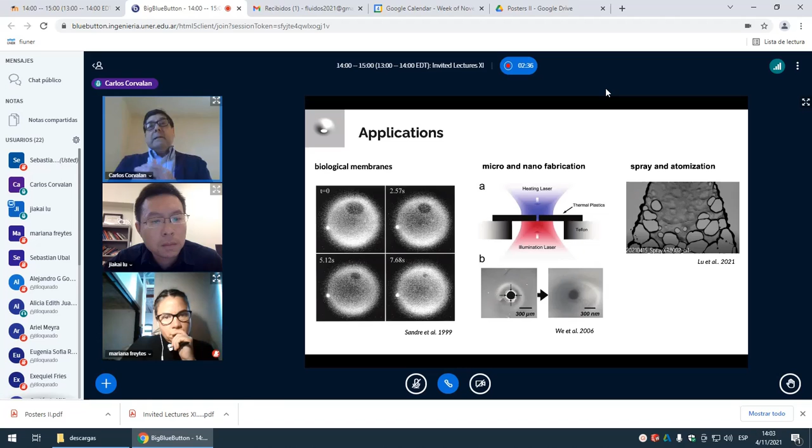This work was supported by generous funding from the US Department of Agriculture and the Department of Defense, in large part because although we are interested in the fundamental fluid mechanics, the results can in principle be applied to several natural and industrial processes involving small pores, including, for example, the behavior of pores in vesicles or in biological membranes. The picture on the left illustrates a pore in a vesicle, and in this case it's important to know in which case this pore will open or will collapse, because that will ultimately determine the fate of the cells. These kinds of pores in vesicles are also typically used for encapsulation of materials inside the cells.

Another application these agencies are interested in is microfabrication, shown in the picture at the center of the slide. For example, nanopores are widely used for nanosensors, for analysis of biomolecules such as DNA and proteins, and it's very difficult to make a nanopore directly. Typically, you use a laser that makes a hole in a substrate, as shown at the top of the central figure, but this hole is in the order of microns, three orders of magnitude larger than what we need. This hole is then left to collapse to the nanoscale, so in this application it's important to understand the rate of collapse, so you know when to stop the contraction process.

The formation of holes also controls the dynamics of sheet breakup in spray and atomization, illustrated in the figure on the right, for example for spray of agrochemicals or for the atomization of propellants in rocket combustion chambers.

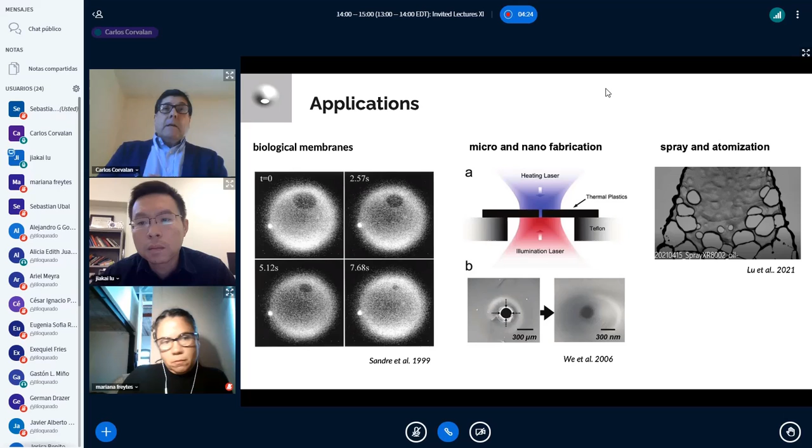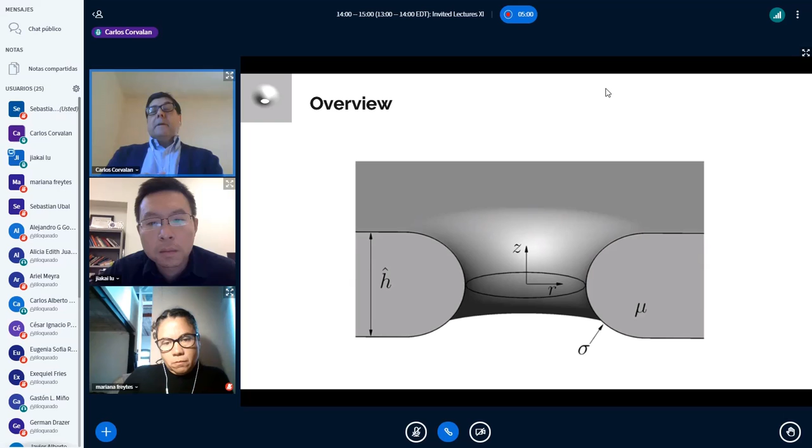So I'm going to give you a quick overview of this talk so we don't get lost in the technical details later. As you can see from the figure, the setting is pretty simple: a pore is just a free surface flow driven by curvature. There is a radial curvature, given by the size, the diameter of the pore, which tends to close and collapse the pore. But there is also an axial curvature, vertical in this figure, typically characterized by the thickness of the film, and this curvature has a different sign, so it tends to open the pore. So there is a competition between these two curvatures, one trying to collapse and the other trying to open the pore.

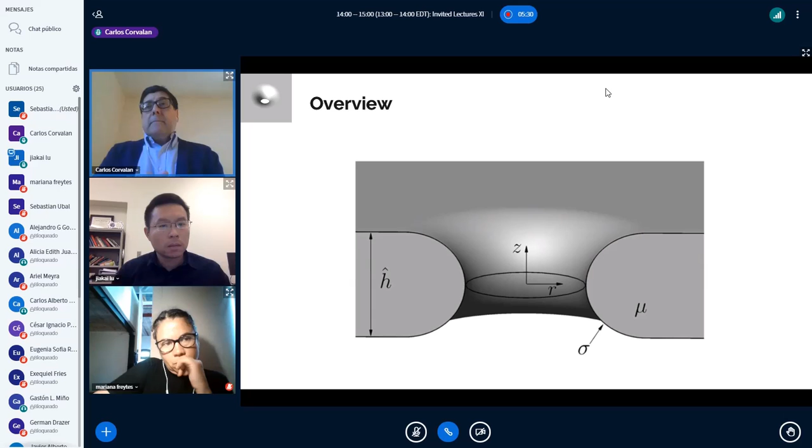So the set is very simple, but we found out that it shows some interesting display of fluid dynamics. We will discuss here in this talk 4 of these ideas.

If the pore collapses, the radius of the pore naturally goes to 0, and therefore the curvature and all the stresses associated with the curvature tend to infinity, so they grow unbounded. At the center of the collapsing pore, there is a singularity where the governing equations break down. And current numerical models have typically big problems handling this singularity.

We were doing some simulations because in practical applications it's important to know the velocity of collapse, as we discussed before. As the pore collapses, the fluid should accelerate toward the center because the curvature increases. But we found that this is true, but only up to a point.

We found that the length scale decreases, but decreases more rapidly than the velocity scale, so that the local Reynolds number, say the Reynolds number at the tip of the pore, in the rim of the pore, decreases. And so the pore always collapses in the viscous regime.

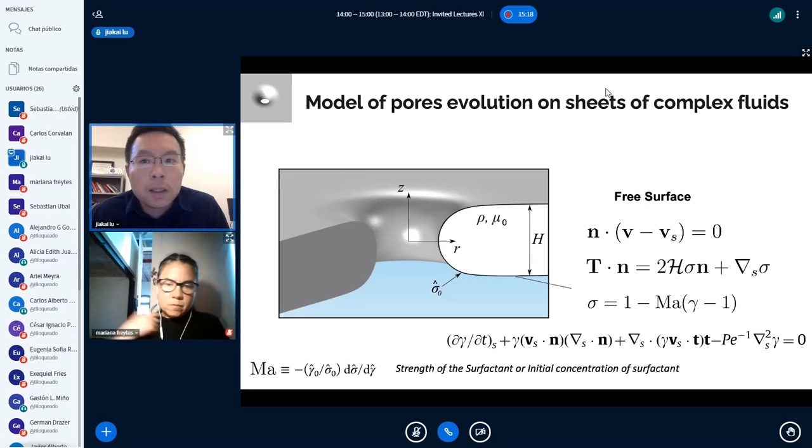When we model the effect of surfactant, the system is also characterized by another dimensionless number, which we call the Marangoni number, indicating the strength of surfactant, or initial concentration of surfactant. If the Marangoni number is 0, that means we are talking about a clean interface.

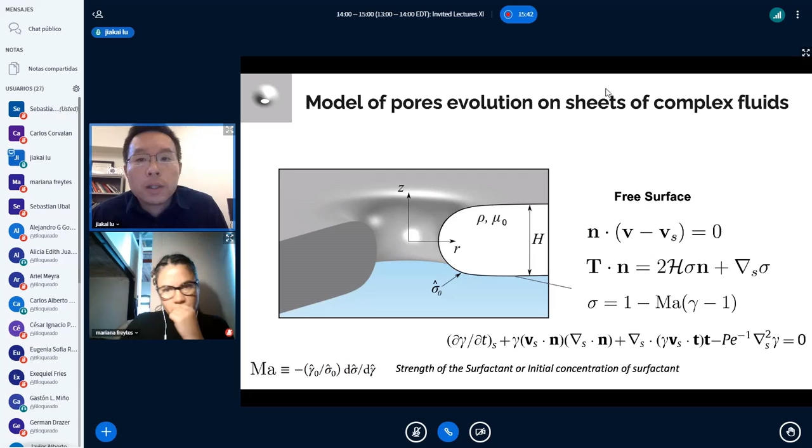I will start by showing some results for pore dynamics with a clean interface, where Marangoni number is 0, and Newtonian fluids, where n, the power law index, is 1.

To start, we'll look at a relatively familiar case in terms of the fate of the pore on the sheet, where the pore is relatively large compared to the thickness of the fluid sheet. Here R0 is 50, meaning the pore radius at the beginning is about 50 times larger than the thickness of the sheet. As Carlos mentioned, in this case the radial curvature, essentially the radius of the pore, is very small compared to the axial curvature dictated by the thickness of the sheet.

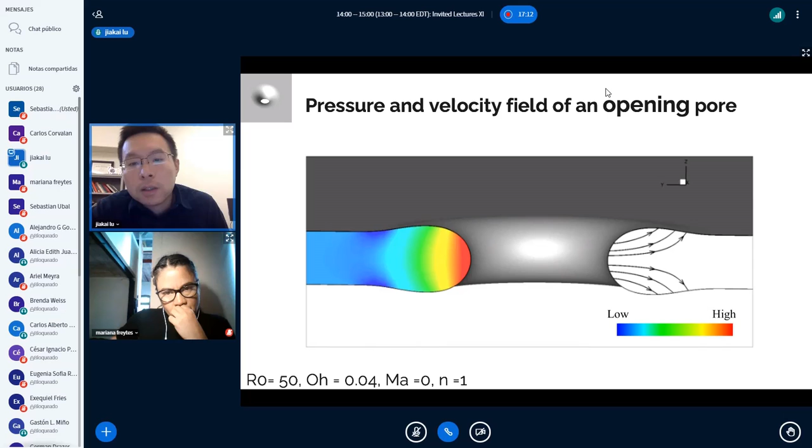So the pore will start to open and expand. From the numerical simulation, we can see that the pressure field shows that at the tip of the pore, the red color indicates high pressure. So we have high capillary pressure there, and everywhere else inside the sheet away from the pore, the pressure is low. The fluid is driven from the high pressure to the low pressure region, which leads to the opening of the pore.

Here we show a bit more of the evolution of the interfacial shapes for the same opening pore. As verification, because this is a very well-studied problem, we were able to compare our shapes with another simulation conducted by Savva and Bush using lubrication models. The figure on the right shows that at the same dimensionless time, our simulation, the solid line, matches very well with the simulation done in other works, giving us more confidence in our results.

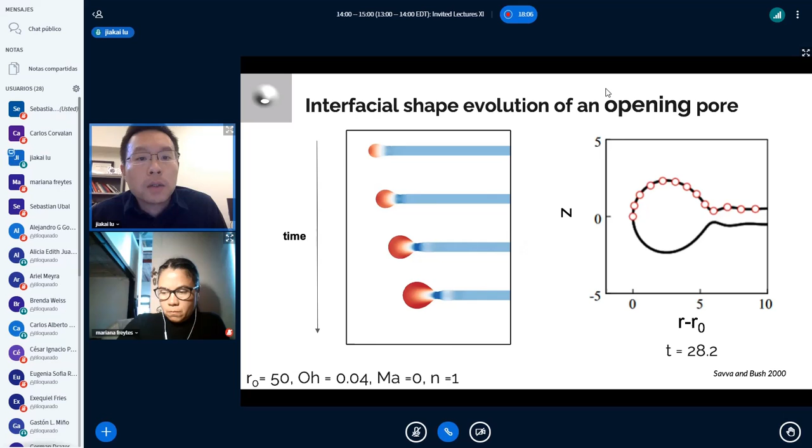To further verify our results, as the pore opens over time, we can see in this figure on the left that the radius of the pore essentially follows a linear relationship with time, indicating that the velocity at which the pore opens is a constant velocity.

And this is indeed our familiar Taylor-Culick velocity, as indicated on the right-hand side figure with the dashed line. You can see that the Taylor-Culick velocity essentially depends on the property of the fluid. Sigma here is the surface tension, rho is the density of the fluid, and the thickness of the fluid sheet, which has nothing to do with the initial radius of the pore.

So everything that's typically larger than half of the sheet thickness, the pore would open, and it would eventually reach the same velocity given the property of the fluid and the thickness of the sheet is the same. So from here, I will turn the focus to the closing pore.

Now that we know that our simulation and the code is robust enough to capture the dynamics, the shape, and the details of the flow field.

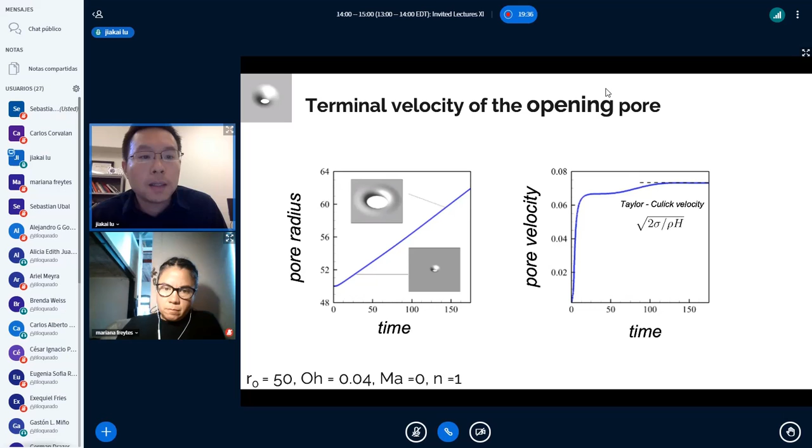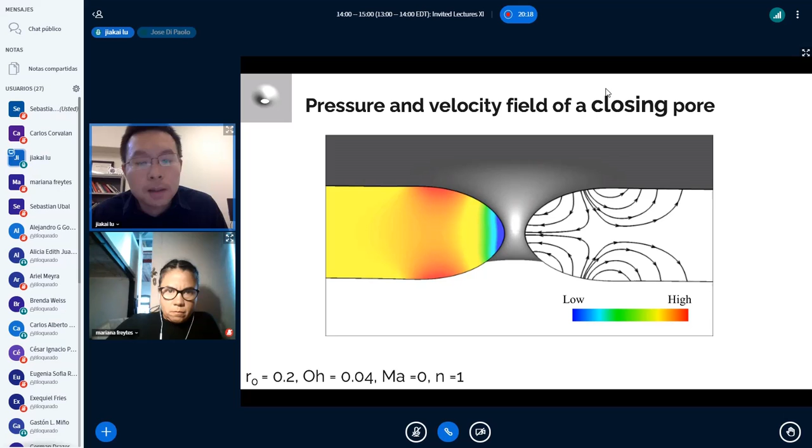So looking at a pore that's relatively small, in general, we would think that if the radius of the pore is smaller than about half the thickness of the sheet, the pore would close. This is because now the radial curvature is dominating, and you can see from the pressure field of this closing pore that close to the tip, pressure becomes low, and the pressure elsewhere in the sheet becomes high, which drives the flow towards the center or towards the singularity, leading to the collapse of the pore.

Now, this is just to show you the dynamics of the closing pore. As you can see, as the pore goes towards the singularity, as it collapses, this is an essentially accelerating event. Here, the Ohnesorge number is about 0.04. Just to give you an idea, this is more or less for an intermediate viscosity fluid. For a millimeter thickness of sheet, the viscosity we are looking at here is about 10 times larger than water.

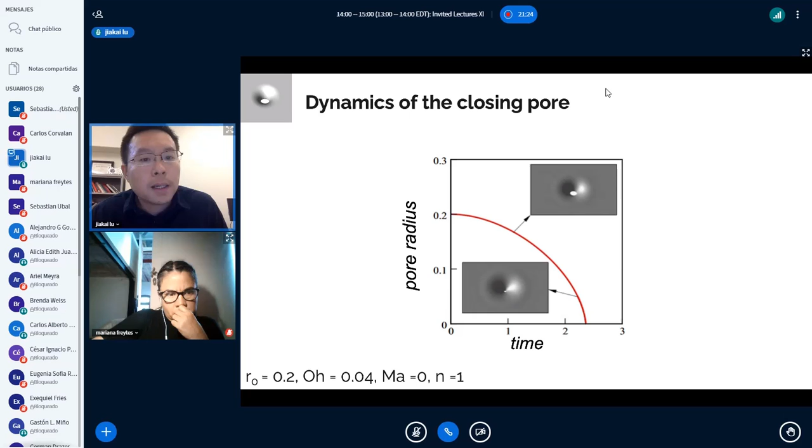Similar to the opening pore, we think that because the initial pore radius at the closing and the final radius close to the singularity differ hugely in terms of length scale, there might also be a scaling or similarity shape that we can explore that dictates the closing dynamics.

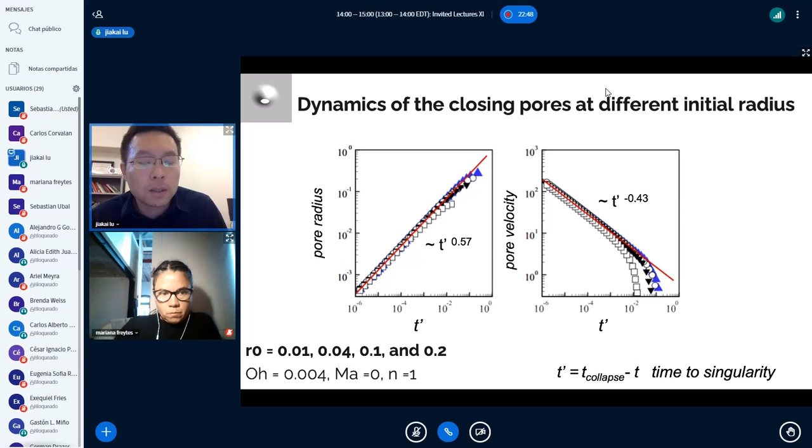We look at this for also a wide range of Ohnesorge numbers, essentially going to the inviscid region, so the Ohnesorge number is going smaller. Here we show that when we change the Ohnesorge number, going to the inviscid limit over 2 orders of magnitude difference, we still see the same scaling towards the collapse.

Now, what's interesting here is that the scaling towards the collapse, the power is 0.57, which is a little different from the typical capillary and inertia force balance when looking at a free surface flow close to the pinch-off. That typical scale would be radius to the T to the power of 2/3, which is about 0.66. This means that compared to our regular inertia-to-capillary force balance, the inertia in this situation grows asymptotically faster than capillarity.

We somehow also verified this because when we are actually looking at a pore closure, this is very similar, particularly when closing to the singularity, to another problem: the pinch-off of a gas bubble.

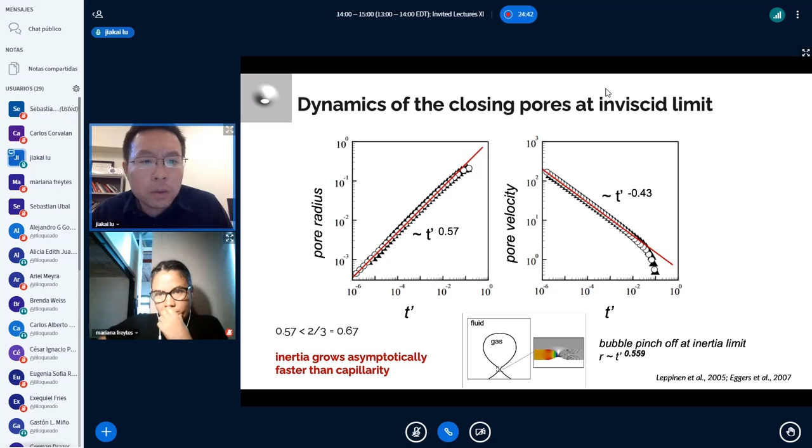Now, what would this accelerating event do to the geometry or interfacial profile of this collapsing pore? Because we know typically the free surface flow is dictated by the interfacial shapes, right?

So what we see here is as the pore is closing in an accelerating fashion, the axial curvature is shown here, along with the geometry Z and R for a closing pore. The axial curvature, shown on the right-hand side, is increasing as the pore radius decreases.

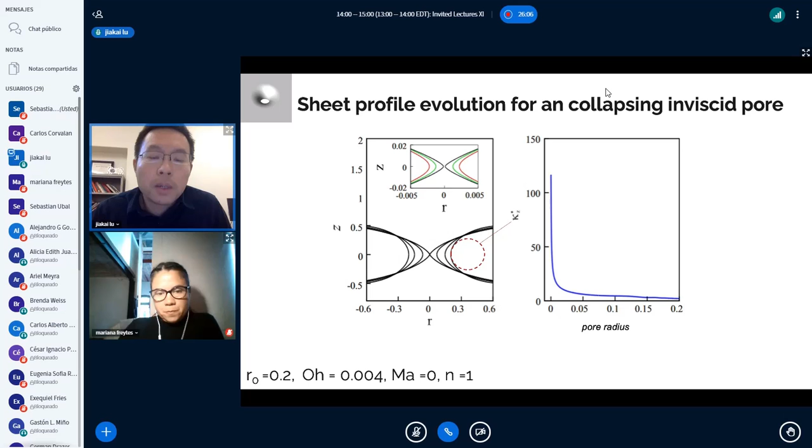In this figure, you need to see from the right to the left. The pore starts at 0.2 in radius and collapses to almost singularity. As you can see, the axial curvature, which stops or prevents the pore from closing, is increasing exponentially. What this would do is, in some cases, when we have a pore that's large but not large enough to open, and it goes toward the collapse event, this increasing axial curvature will reverse the process and turn the pore around, making it open again.

We did several simulations for a pore starting with different initial radii, and we found that at an initial radius of about 0.35 to 0.36, the pore would flip from closing for a smaller radius to a flickering case, where the pore starts to close then opens again. This is a dynamic process that essentially reduces the critical radius at which the pore can close or open, compared to our traditional understanding of about half the thickness of the sheet, which is 0.5. In this case, if you start a pore at 0.5 thickness of the sheet, it will actually open instead of closing.

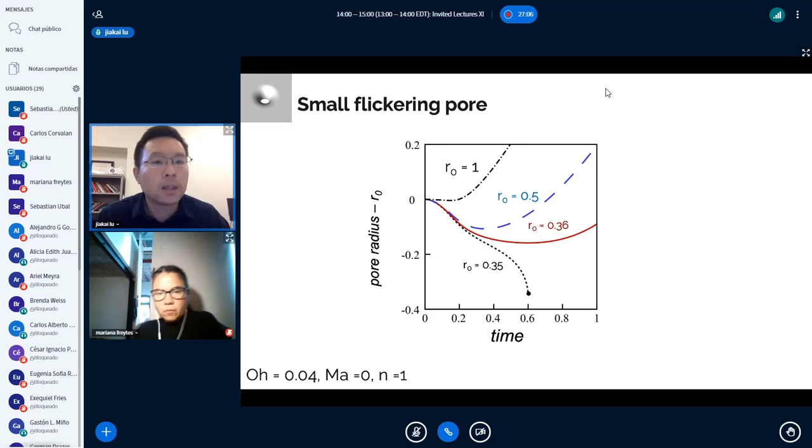So now that we know how an inviscid pore would close, what about in the viscous limit? Here we show that for the dynamics of a closing viscous pore with Ohnesorge number 5, which is a very viscous fluid, the pore radius closes following a linear relationship to singularity. This is much better understood than the inviscid case, since it's somewhat expected as we balance the capillary force and viscous force close to the singularity. We would expect a linear relationship between the minimum radius and time to singularity.

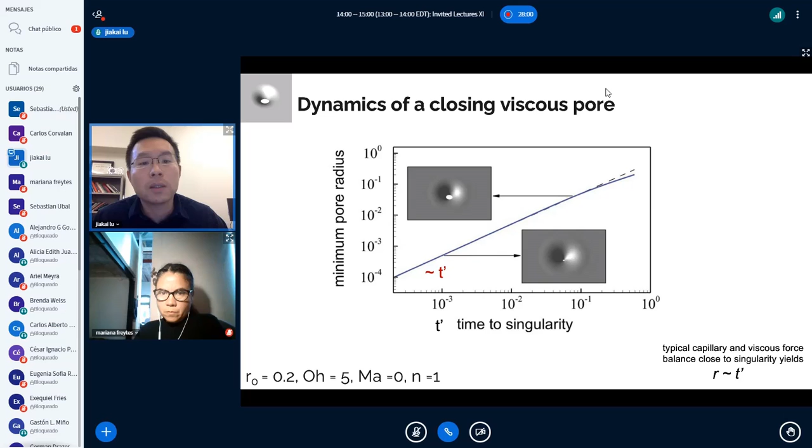But what's more interesting here, if we look closer at the problem, is what happens as we approach singularity. From our simulations, we find that at the tip of the pore, the capillary force is essentially dictated by the radial curvature, so 1 over Rm, where Rm is the minimum radius of the pore. The simulation also shows that the viscous stress balancing that capillary stress at the tip is approximately equal to 2 times the velocity of the pore divided by the radius—that is tau RR, one of the terms in the stress tensor. By balancing these two forces, we get exactly a constant value.

So we conclude that when looking at the collapse of a viscous pore, the radius closes at a constant velocity. Not only that, this constant velocity is irrelevant to the thickness of the sheet, and is only related to the capillary viscous velocity, with a prefactor of 0.5.

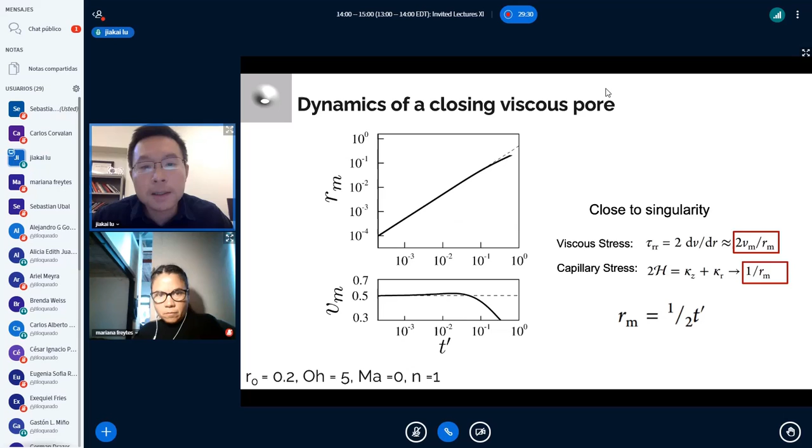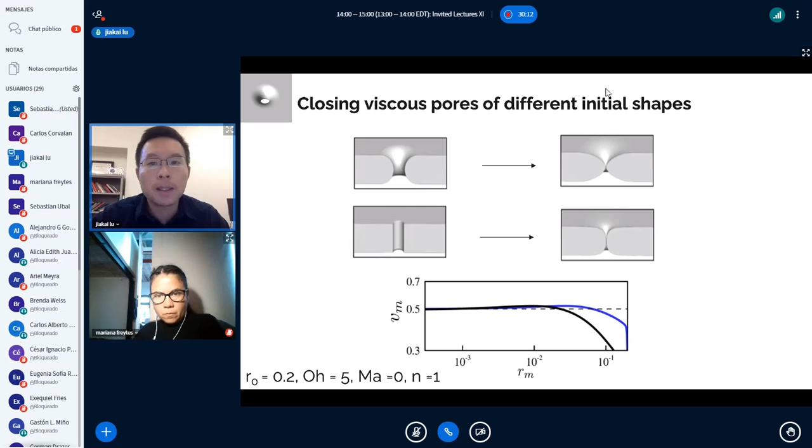We did several parametric studies to verify whether this scaling is universal enough that it shouldn't be affected by the initial geometry of the system. We looked at the collapsing of pores on a viscous sheet starting with different initial shapes. Here on the upper line, you have a toroidal shape to start, or alternatively a cylindrical pore. Both show that as they go towards collapse—though the dynamic transition part differs—they all converge to that 0.5 velocity, indicating this scaling holds for different initial shapes.

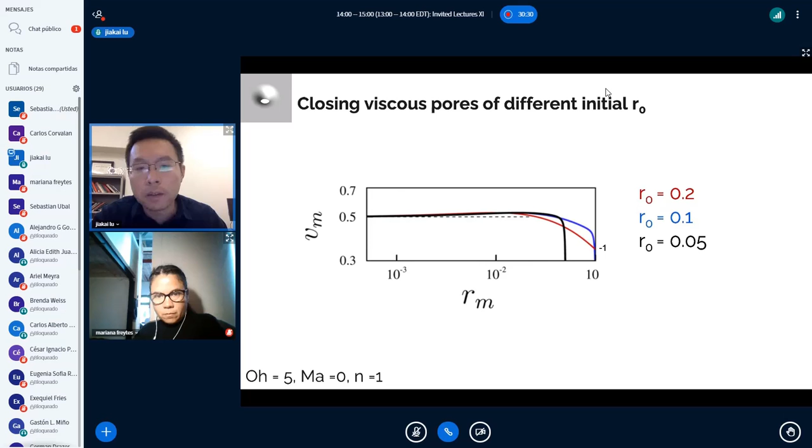We also conducted simulations for pores starting with different initial radii, and they all go to the same constant velocity, again verifying this universal scaling of pore collapse dynamics for a viscous sheet.

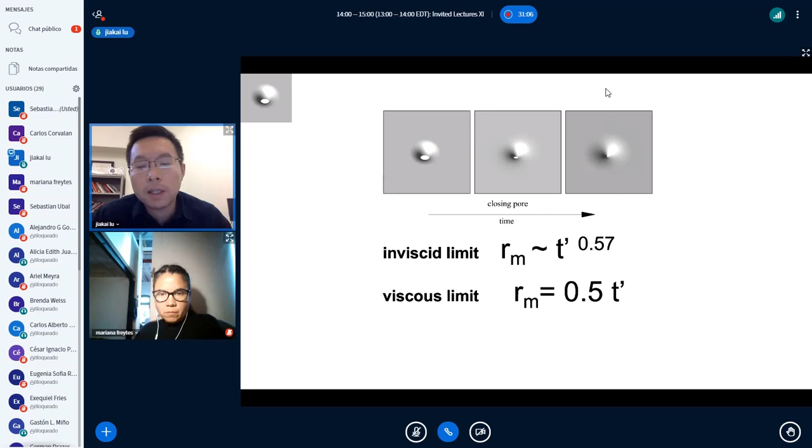So a short summary here: when looking at a closing pore on the sheet, in the inviscid limit, the dynamics follow a scaling where the minimum radius goes as T prime to the power of 0.57, indicating that inertia dominates in this situation. If we look at the pure viscous case, we have a constant velocity, equal to half of the capillary viscous velocity. Now, what about the intermediate viscosities?

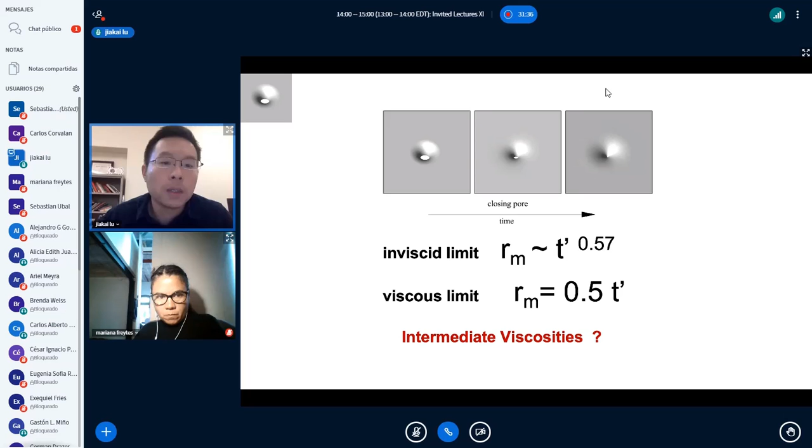From our simulation, we see that it gets close to the singularity. The viscous force, which is also scaled with 1 over r, dominates the phenomenon, which is why we see a viscous scale at the end of this process.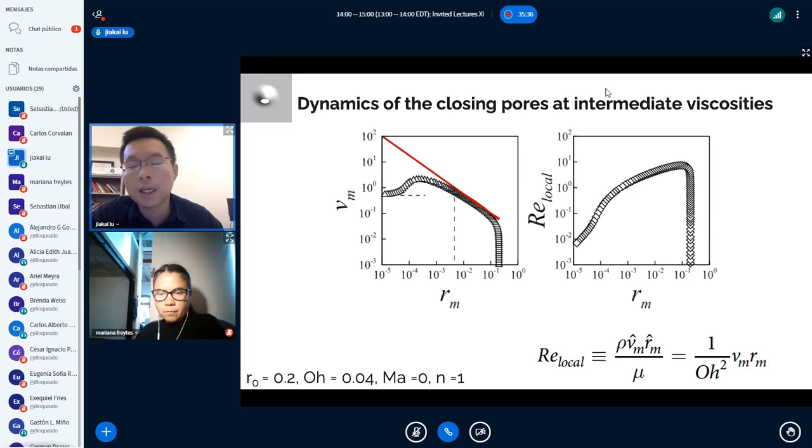By running simulations over several Ohnesorge numbers of relatively low viscosity, we see that as we reduce the Ohnesorge number, the velocity would increase then decrease during the collapse of the pore. However, they would always go back to the constant velocity, indicating that the dynamics transit from the inertia-dominated case to the viscous-dominated case.

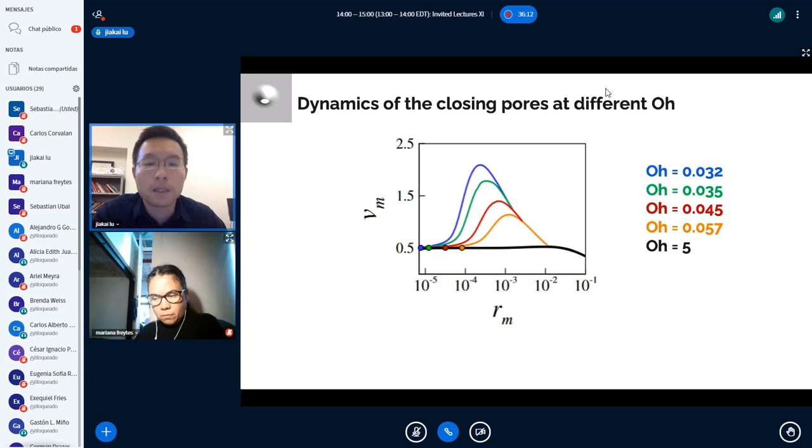Another thing we look at is the velocity field for a collapsing pore. Let's focus on the right-hand side of this slide, the same case we saw before. As the pore closes, the pattern or flow field of a closing pore changes significantly, going from a relatively pressure-driven flow, with a nice gradient of velocity going from low to high, to a different flow field as we get close to the viscous-dominated region.

We find that this flow field is very much similar to the flow field in the viscous-dominated case. The difference is that one starts to show this flow pattern early, while the intermediate Ohnesorge number case shows this flow pattern late.

Although we don't have a clear explanation for why we'd see this strange flow field for the viscous case, we also see that in particular for the viscous case, when we get close to the pinch-off, there's a huge velocity gradient close to the tip, indicating that the shear stress there is going to be huge.

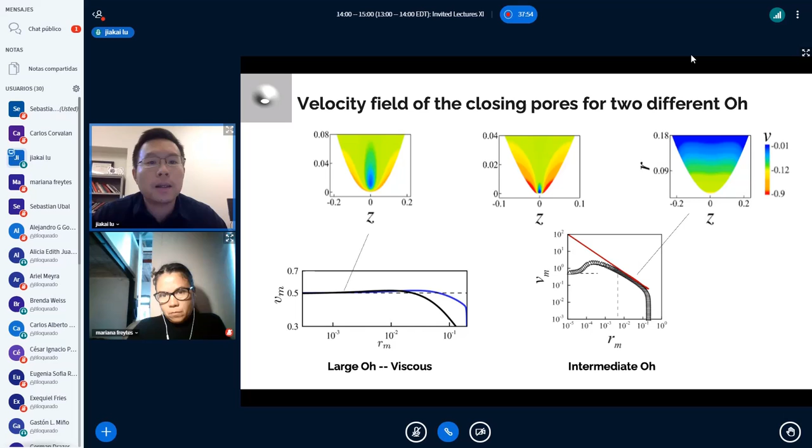That leads us to the pinch-off closing dynamics of pores in shear-thinning fluids. Here, if we run a pore on a fluid that's weakly shear-thinning, I should mention that on the right-hand side of the slide, we model the fluid using a Carreau-Yasuda model, so the apparent viscosity mu decreases as the shear increases in a power-law fashion. In this case, N is 0.7, so that's an intermediate or weakly shear-thinning fluid.

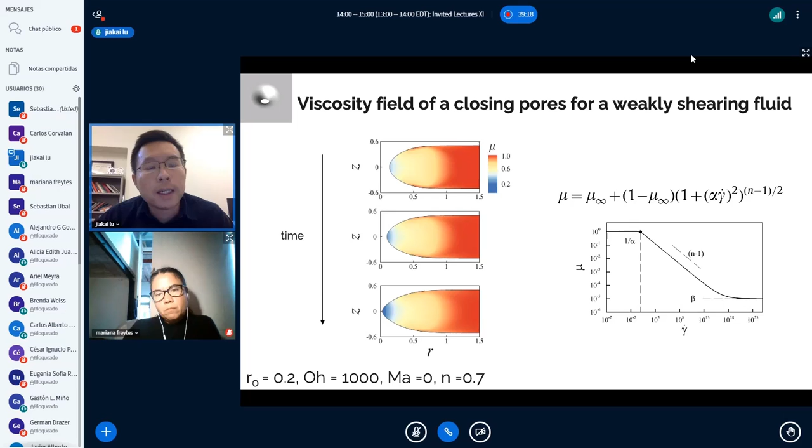During the process, as the pore closes, the shear increases close to the pore tip, and high shear reduces local viscosity significantly. As you can see here, blue represents about 10% of the zero shear viscosity. So what that does to the dynamics of the pore closing is that low viscosity makes the pore close faster, similar to an inviscid case. That's actually what we see when we compare two pore closing cases, one on Newtonian fluids and the other on non-Newtonian fluids.

As the pore closes, the pore on the non-Newtonian fluids, characterized by shear thinning behavior, would have an accelerating pore speed compared to the pore on the Newtonian fluids, which eventually goes to a constant velocity.

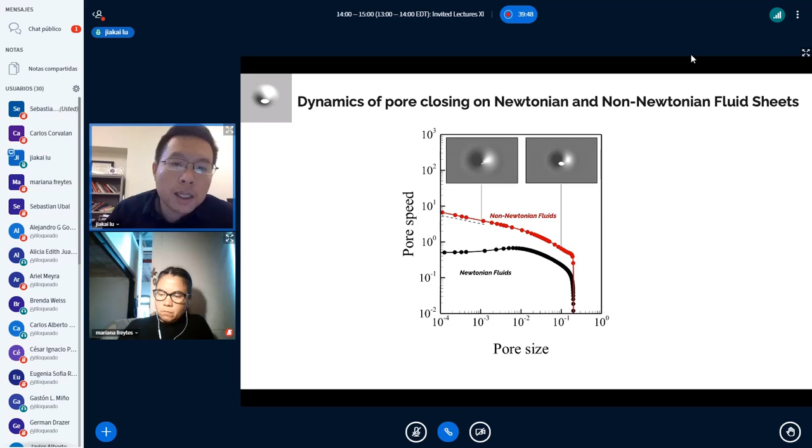If we run simulations over a wide range of power law index, what we find is that at different power law index, as the pore closes, looking at the figure on the left-hand side, different power law index gives different scalings for how the closing velocity is related to the pore radius. If we look closely at the instantaneous power to this curve on the right-hand side, we see that at the end, when we get close to the singularity, all of the cases have a nice constant power. The power of this scaling follows a relationship with the power law index n value, which is exactly n minus 1 over n.

This will be a good strategy for us to obtain the shear thinning or non-Newtonian property of certain fluids when things become difficult to measure in a regular rheometer.

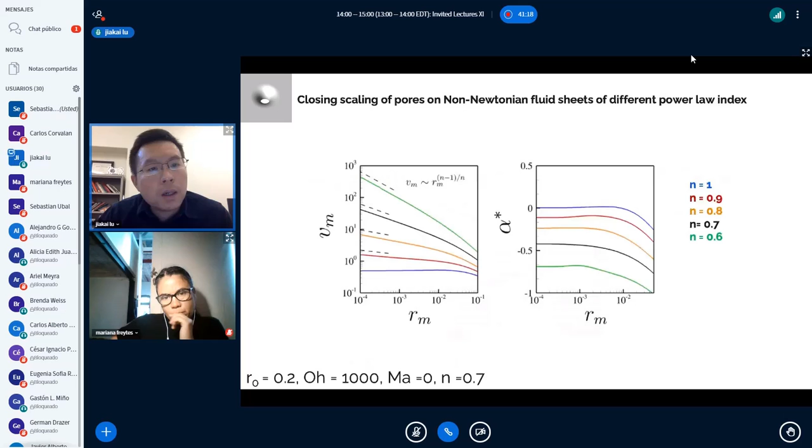Now that we also know what's happening for a shear thinning fluid, let's look at the pore closing on a surfactant contaminated interface. Before that, let's look at how the convection diffusion equation models this transport of surfactant on the interface. As I mentioned, there are three effects: change of local area of surface, which is the second term in this equation, convection, the third term, and diffusion. Typically diffusion is not important.

So in our simulations, we make a huge Peclet number to eliminate the effect of diffusion, which leaves us a competition between local change of surface area and convection. We suspect that as the pore approaches singularity, because the reduction of the radius is huge, the local change of surface area is going to dominate, which would lead to a very low interfacial tension close to the tip.

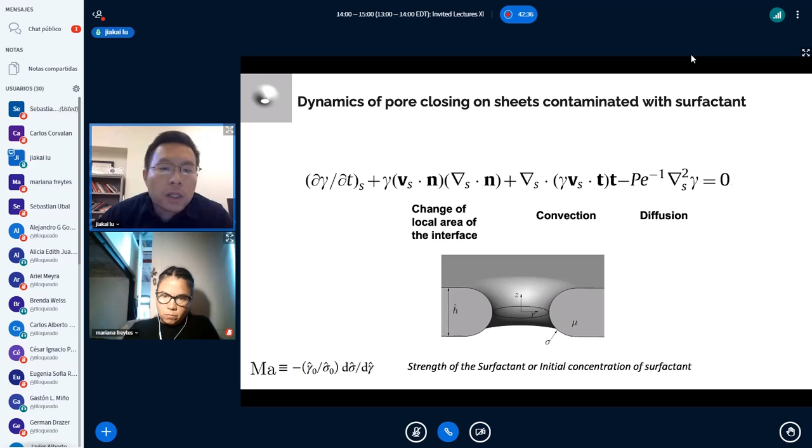What we find in our simulation also verifies our hypothesis. If we run a model with a very small Marangoni number—remember, Marangoni number can be thought of as surfactant with very low strength or very dilute surfactant concentration at the beginning—we still see a nice effect. For the case with surfactant, the pore velocity reduces as it goes to collapse, compared to a case with a clean interface.

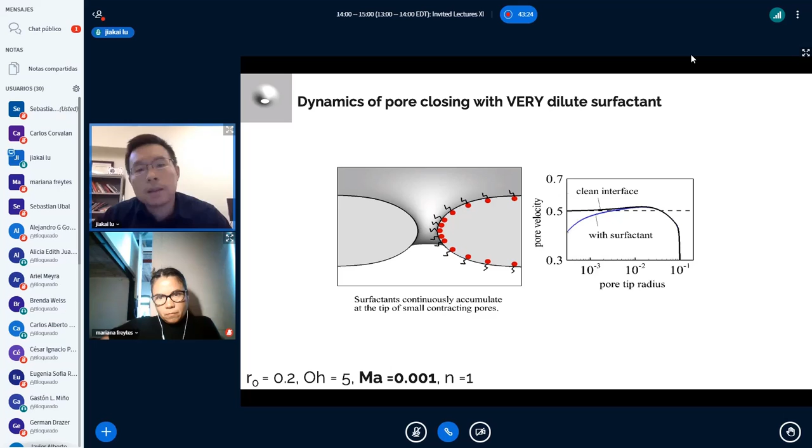We feel like if this is true... we also show here the local tension and how that changes during the process. We see that the surface tension on the interface reduces significantly and sharply close to the pore tip. On the right-hand side of this figure is the distribution of local surface tension on the interface.

Here, because we are also looking at a large surface tension gradient, what that incurs is what we call the Marangoni stress. However, we think that the change of local surface tension is still dominating. There shouldn't be too much influence of the Marangoni stress on the dynamic process.

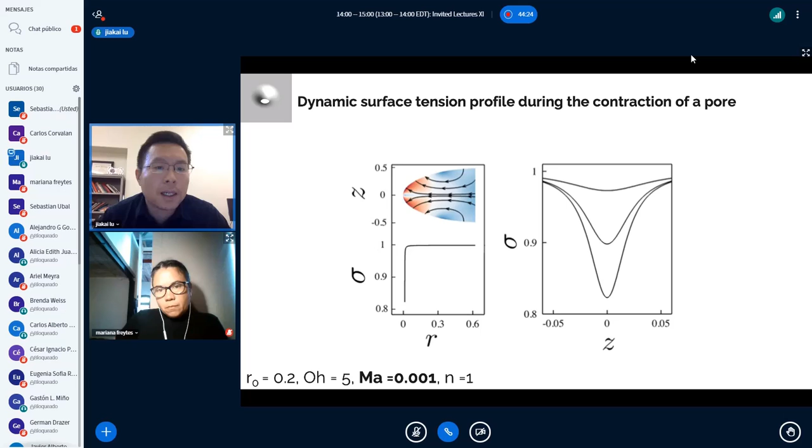To verify that, remember we have our constant velocity of the closing pore. If the only thing that's relevant here is the local drop of surface tension, the velocity should follow approximately local surface tension divided by 2. That's also verified from a large number of simulations for different Marangoni numbers shown in this figure.

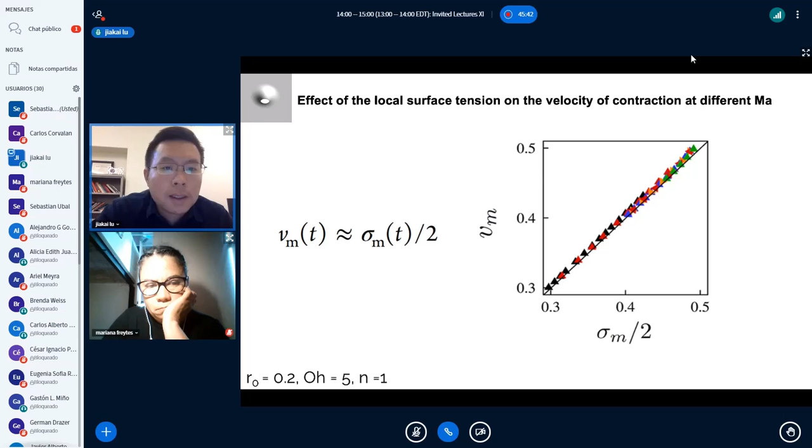Here on the x-axis, what you're actually seeing is how local surface tension changes as the pore closes. It starts with a large value on the right-hand side, indicating the moment when the pore is still large, going to the left-hand side when the pore is relatively small. This figure suggests that the only thing that's relevant for the closure of a pore on a surfactant contaminated sheet is the drop of local surface tension, and the Marangoni stress in this situation is not relevant.

So that brings me to a small summary of what I just showed. Here we see that for an inviscid pore, it closes at an accelerating speed, following a scaling indicating that inertia would asymptotically dominate over the capillarity.

And if the pore closes on a viscous sheet, it would close at a constant speed. And for pores on the intermediate viscosity sheet, there is a transition between the inviscid region towards the viscous region.

And for pores collapsing on a shear thinning fluid sheet, they all show an accelerating closure similar to the inviscid situation. We find a very nice relationship between the power law index N and the power of the radius of the pore during closure, hinting that there could be nice strategies to measure the rheological properties of certain fluids.

And finally, we also see that when surfactant is present in the sheet, even with very little amount of surfactant, the pore velocity is retarded due to the local accumulation of surfactant close to the pore, driven by the fast contraction of the radius.

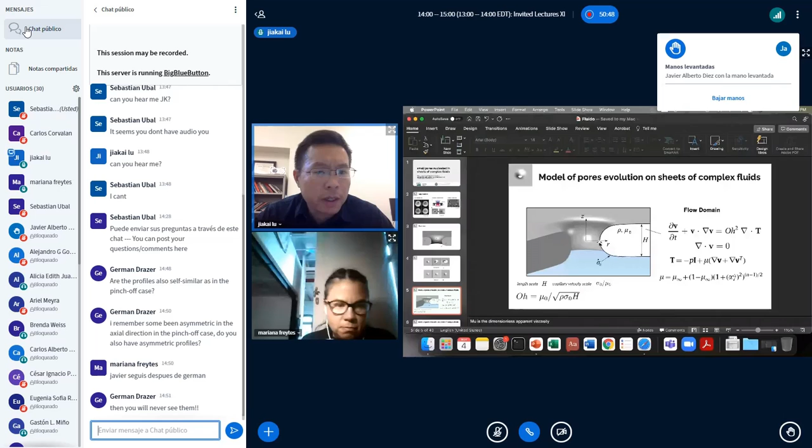Okay, German says: then you will never see them. Well...

Javier is now speaking. Okay, it's just a comment and maybe a question. I guess you are simulating only half part of the sheet, only the upper part or the lower part, because of symmetry reasons. Yes.

Yes. So the problem looks like a sheet supported on a substrate that is collapsing or opening. I mean, here you are thinking of a sheet suspended in air, or suspended in a bigger ring that connects with some boundaries, because it's an infinite sheet with no gravity effects, of course.

So this problem reminds me of an old problem that I dealt with in my PhD some years ago with Dr. Gratton, which was the collapse of a hole that produces in a film on top of a substrate, a rigid substrate. But in that case, only gravitational forces and viscous forces were taken into account.

And I remember we obtained also a self-similar solution with an exponent similar to the one you are getting here. In that case, it was 0.76. And that was verified experimentally too.

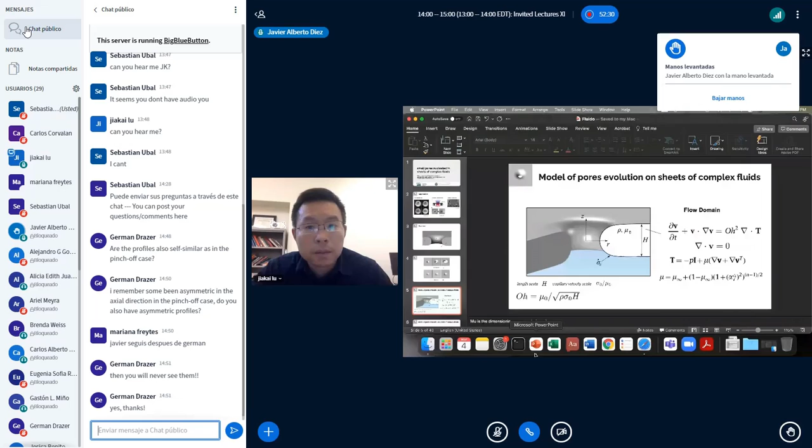As far as I know, there were many other authors that continued with that problem over time and also included surface tension effects. I don't remember if it was as complete a problem as you are doing here with Marangoni effects. But this problem can also be applied similar to the case of a sheet supported on a substrate with a contact angle of 90 degrees or something like that. So it could be an extension of the problem.

So that's my comment. Thanks for the comment. Yeah, similar problems have been dealt with, but this is very complete because you are including non-Newtonian effects and surface tension and Marangoni effects, so it's very complete and it's an advance in the subject. I'm glad that you guys are doing this because it's an extension of those old problems.

My suggestion is that maybe you could think of working this problem also with a film supported on a substrate. That could be another extension too, and I'm sure there is something else new to learn about the problem.

Yes, thanks a lot for the comment. Actually, we also realized that a similar problem to this is on a substrate, and we were conducting some simulations in that sense. For instance, if we assume a perfect slip condition, a film on a super hydrophobic surface, I do also see several works recover a similar scaling to what we see here, the collapse of the pore. And even the constant velocity is also recovered if the film is supported on a substrate in our simulations. The contact angle may be important, or gravity, which is something we would take a look at in the future.

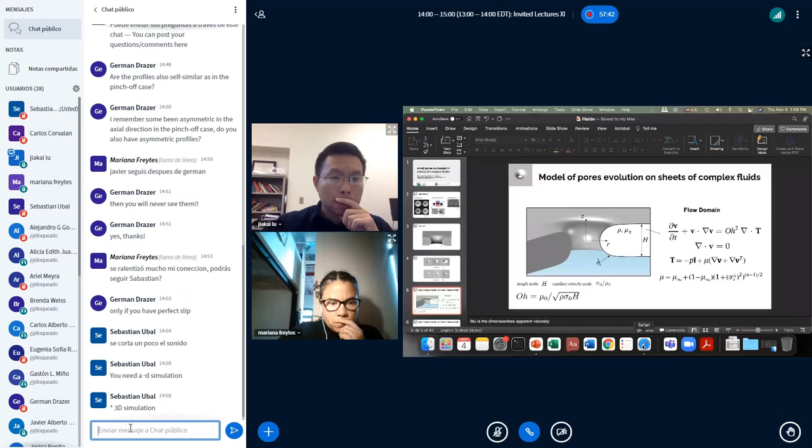Sebastian Ubal says you need a 3D simulation. You are now unmuted.

Now that we're talking, it just occurred to me, we do see in some situations that symmetricity is broken, because when we simulate the full interface, and if we start with an uneven distribution of surfactant—meaning surfactant on top of the surface and no surfactant on the bottom surface—in those cases the Marangoni stress becomes relevant and the sheet bends, and that breaks the symmetry. We were only able to follow that case a little bit. Maybe that's something interesting to see in the future.

Yeah, I think following on that, I recall an old paper by Lister and Stone, or something like that, showing that it actually becomes non-local, so the far field, as you're saying, ends up telling you which direction you're going to go. So it could be there too, without the Marangoni effect.